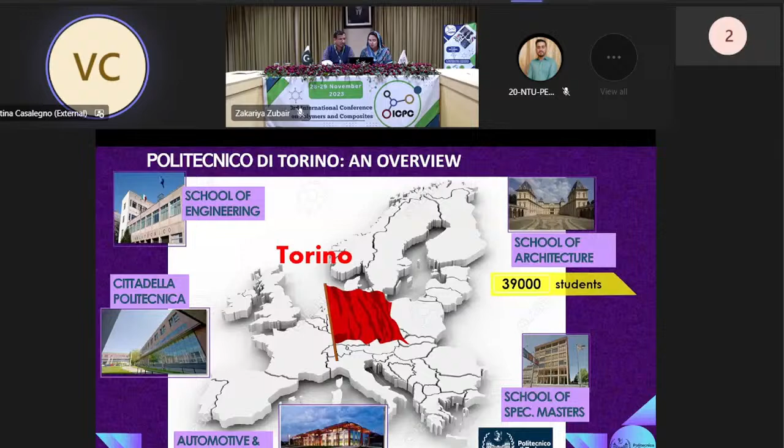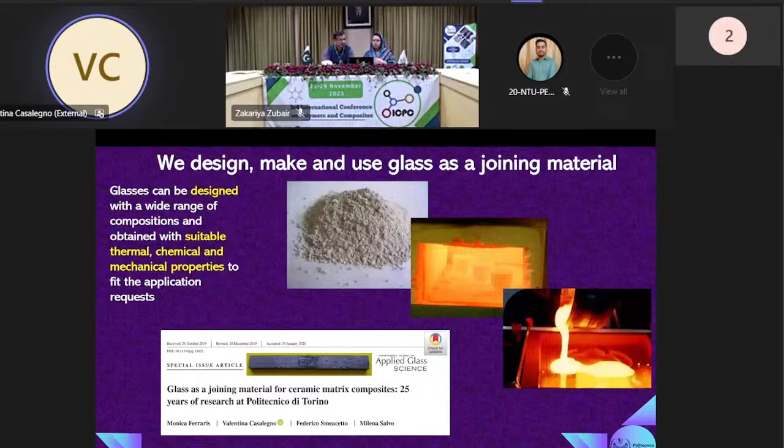We are involved in this kind of research for several years, and we started more or less 20-25 years ago. We developed this kind of joining materials for different applications for ceramics, but also for composites, polymeric-based composites, or CMC composites, or also for dissimilar joints, so CMCs to metals or to other kinds of materials.

Why do we choose glasses and glass ceramics as joining materials? First of all, because they are versatile. We can define their composition, and we can tailor, based on different composition, the coefficient of thermal expansion or the wettability behavior on different substrates. In general, glasses are able to wet ceramics and composites, ceramic-based composites, and then they can be used as joining materials in joining processes without applying any pressure.

This is very important for the technology transfer of these processes to companies. We can transform glasses into glass ceramics using controlled crystallization process, and this is beneficial in order to improve the creep resistance and the thermomechanical behavior of the joint. These joining material glasses can also be self-healing at temperature above the softening point, and of course they are low-cost materials and not affected by oxidation if compared, for instance, to metals or to metallic brazing alloys.

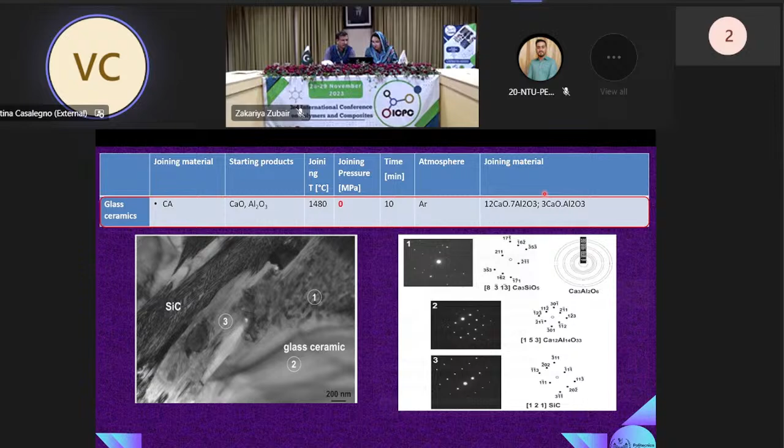This material was studied and designed in particular for nuclear environment. And here you can see some nice pictures of joined silicon carbide based materials.

And we tested also this glass ceramic under specific nuclear irradiation, and this glass ceramic was neutron resistant up to 530 degrees at 20 dPa. That is a sort of threshold for the behavior of materials in nuclear environment.

And the most interesting result was that the thermomechanical properties of this joining material did not change after this test. So after morphological observation and after mechanical test, the structural properties of this glass ceramic material and also of the joined components were not changed.

And we also tested some other composition of glasses and then glass ceramic for joining oxide-oxide composites. Here you have an example of the cross-section of a joined component, and here the base materials to be joined are oxide-oxide CMCs. So they have a matrix of alumina and zirconia, and they are reinforced by alumina fibers.

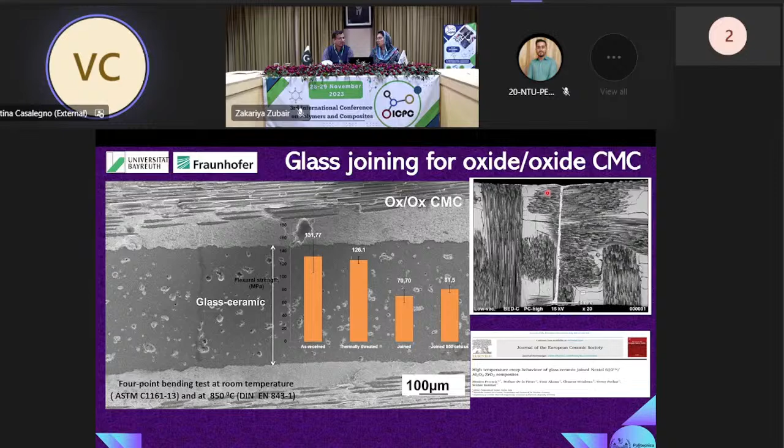joined components. And we performed also other characterization in order to investigate the creep behavior, since the idea is to use these joined materials at high temperature. And here you have the results of some creep test carried out at 1000 degrees for 50 hours at a load of 40 megapascal in bending stress.

And it was demonstrated that these joined components obtained by using this glass ceramic can be stable up to these conditions.

We also studied other systems for joining CMCs, not only to other CMCs, but also to metals. This is an example of the same composites, so a matrix made of alumina and zirconia, and the reinforcement is given by Nextel 610, which are alumina fibers, joined with titanium alloy, titanium 6 aluminum 4 vanadium alloy, and also in this case we used a glass ceramic as a sealant material.

And here you have another activity carried out by Professor Smeacetto and Professor Monica Ferraris, who are involved in research on joining materials here at Politecnico di Torino.

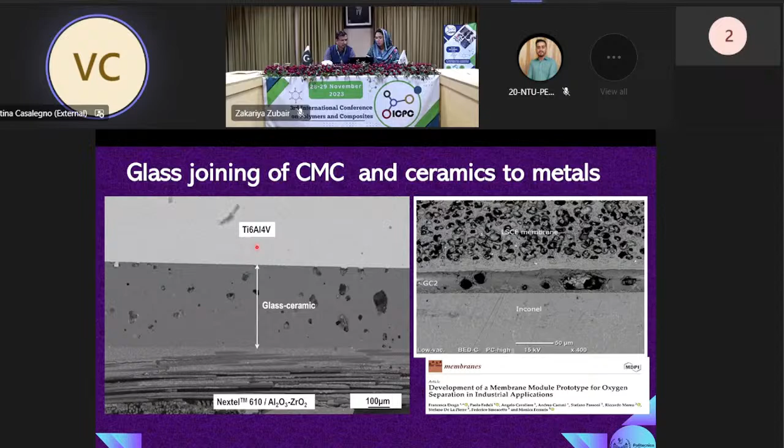And also in this case, we used a different glass ceramic material to join metallic material, Inconel, to ceramic material for different applications. As you can see, there are some porosities in the joining material, but this is common for glasses and glass ceramics, and they are not detrimental for the thermomechanical resistance of the joint.

Other activity regarded the study of a specific joining technique that we call the RM, wrap joining technique. RM stands for refractory metal material. So the idea is to use a sort of wrap of materials made of pure silicon and then a refractory metal - in principle molybdenum, tantalum, zirconium, or niobium - and use this wrap of materials to obtain the joint

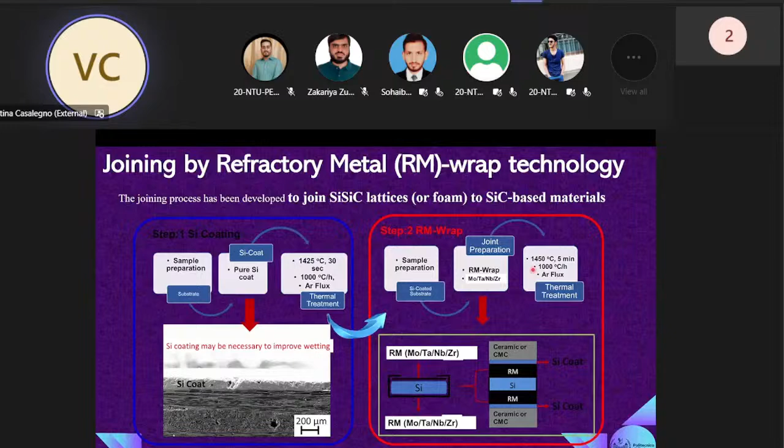between different substrate materials. We tested this specific joining process on bulk ceramic and on different CMCs: silicon carbide matrix reinforced by silicon carbide fibers, or silicon carbide matrix reinforced by carbon fibers. And the joining process was carried out at around 1400 degrees for 5 minutes. So here you have the result of this activity.

We use this joining technique to join different kinds of materials and different shapes of materials. In this case, in picture A, you can see that we used this joining material to join a silicon carbide based foam. And the final structure of the joining material is shown in picture B.

It is in principle an in situ formed composite material where the matrix is made of silicon, and the reinforcement particles of this in situ composite are molybdenum disilicides, or if we use different refractory metals, niobium disilicides or other compounds. In the picture with the yellow frame, you can see the result of an oxidation test on this kind of joint, and we can observe that the microstructure was unchanged after this oxidation test carried out at 1100 degrees for several hours, in air, to check the oxidation behavior of this joining material.

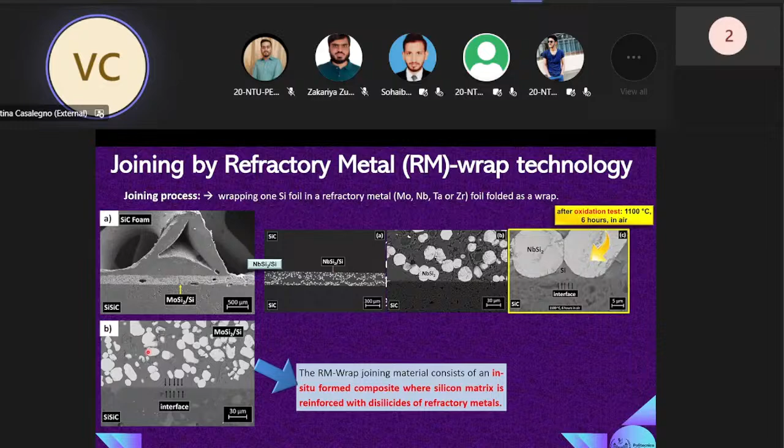Another activity, I'll give you a few details, was carried out for improving the mechanical resistance of the joint. The idea is to do a sort of machining of the surface to improve the strength of the joint and to create interlocked surfaces.

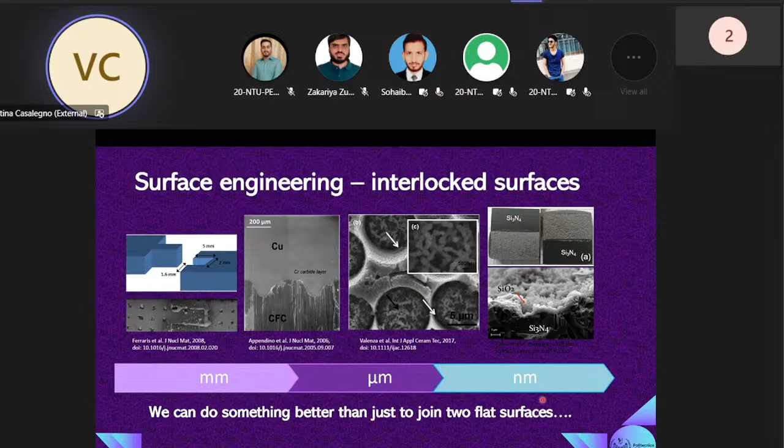So we started from the macro scale, millimeter machining of the surface of the materials to be joined, moving to micro scale and nanometer scale. The idea is to use this modification of the surface in case of non-direct joining, so in case of a joint obtained with some filler, to increase the strength of the joint and the adhesion of the joining material. So we can use the preparation of the surface to remove contaminants, or to obtain a sort of chemical functionalization of the surface.

But our activity focused on texturing, to obtain a sort of increased roughness on the surface. The idea is to promote the interlocking effect by the retention of the joining material in the joining area, and by improving the formation of anchoring points between the joining material and the surface.

This is the idea of this mechanical interlocking, to create brush joints between the two surfaces in order to maximize the interface strength and to create a non-planar interface and non-planar contact area, increasing the mechanical properties of the joint. This is, for instance, one of the activities that we carried out.

As you can see on the right, there is a silicon carbide composite that was surface structured, and in this way we increase the interlocking effect and the penetration of the brazing alloy.

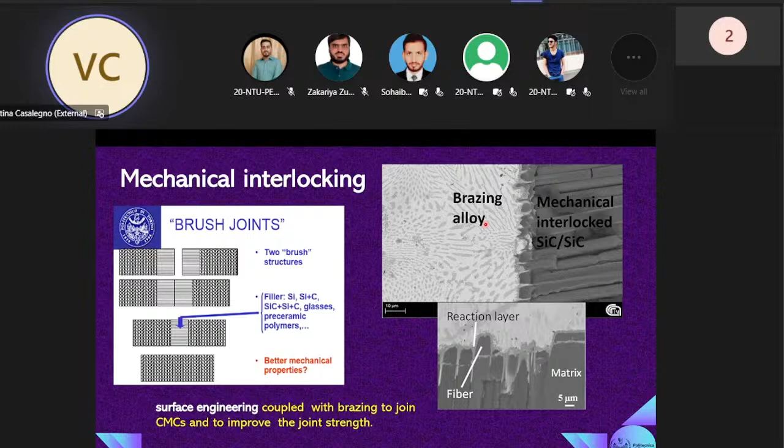I will skip these two slides, sorry, because I just want to show this activity concerning the modification of the surface in case of silicon carbide composite.

The idea is to obtain a selective removal of the fibers using different conditions of plasma etching, based on different gases, different applied power, and different exposure time.

The final effect is visible here on the left. This is the microstructure of untreated silicon carbide composite. And then you can see the results of different etching treatments, where we did a sort of preferential etching of the fibers.

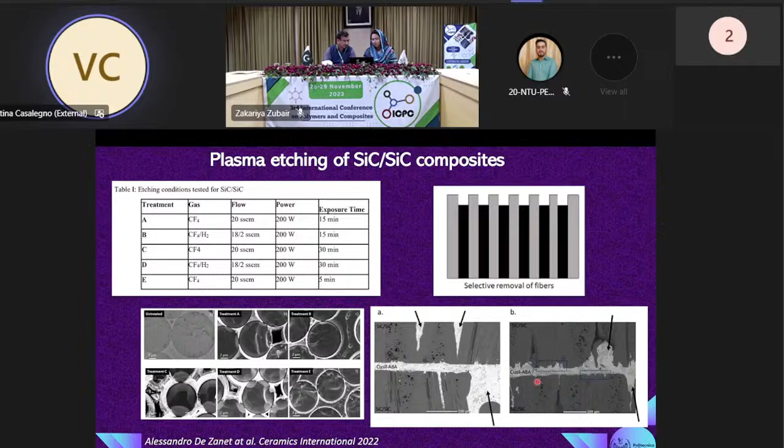And this was beneficial in terms of interpenetration of the brazing material inside this area of the fibers that have been removed by this etching.

We tried to check and assess the real effect of this structuring by using a single lap offset test in compression. Untreated joined CMCs reached a strength of around 76 megapascals, while in case of these brush-like structured samples, the average mechanical strength was around 120 megapascals. So this is a very good result.

We also tried other activities by modifying the surface using a sort of thermal etching of the surface.

This is the result in case of SiC/SiC composites using different treatments at 1450 degrees for 2 hours and for 4 hours in a controlled atmosphere. The best results were obtained with the shorter treatment. It is possible to observe a sort of matching on the surface, which is beneficial for the retention of the joining material and for this interlocking effect. This is the result of these modified surfaces, shown on the bottom part of the slide.

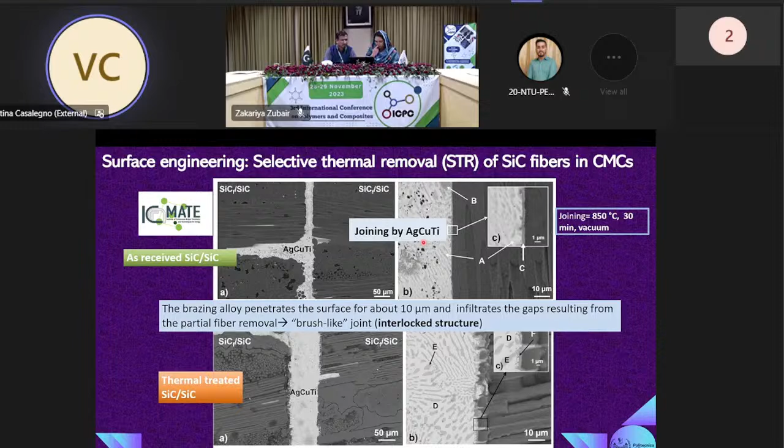Okay, I will finish in 3 minutes, I think. I just want to show you the results of this CEM-WAVE project.

We worked also within this European project for the study of joining for silicon carbide and oxide materials. The idea is to try to replace the metallic tubes commonly used in this part of components used in the steelmaking process and industries, by using CMCs produced with a specific technique: chemical vapor infiltration based on microwave.

We worked on different kinds of joints, butt joint and flat joint, according to the direction of the fibers. And we focused our activity on selection of glass ceramics and brazing alloys for these two kinds of materials: silicon carbide and oxide CMCs.

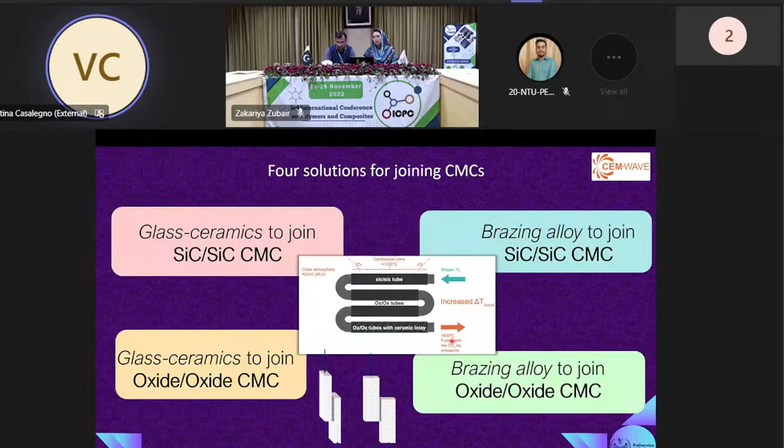Just a few pictures concerning this activity on the use of brazing alloys for silicon carbide. We tested a specific joining material based on nickel, chromium, and iron, and we solved the most important infiltration issue of this brazing alloy within the open porosities of the composites by using modification of the surface, for instance by introducing additional interlayers, in this case a molybdenum interlayer.

The other activity regarded the use of a specific glass ceramic composition to join oxide CMCs. You can find more information concerning this activity in the Journal of the European Ceramic Society.

And in this case, we tested these specific joints in some extreme environments by exposing directly the joining material and the joined components to this flame test, in order to reproduce the steelmaking environment and the final conditions where these components were to be placed.

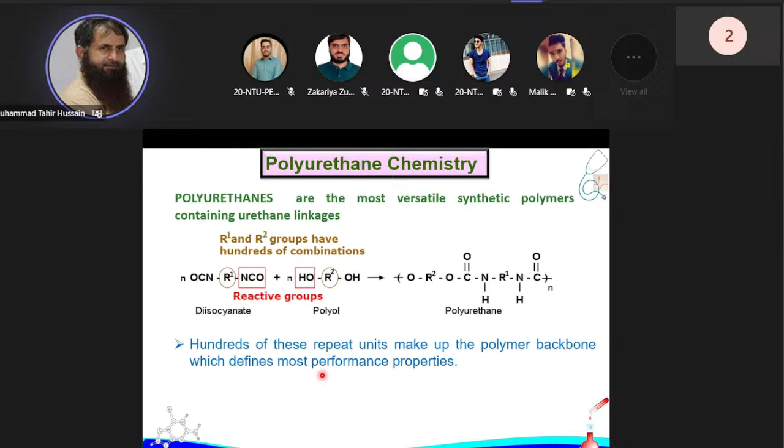If we look at the polyurethane family, polyurethanes comprise flexible polyurethane foams, rigid polyurethane foams, coating adhesives, sealants, and elastomers, thermoplastic polyurethanes, binders, and water dispersible polyurethanes.

So what are water dispersible polyurethanes? These are binary colloidal systems where stabilizing group containing PU particles are dispersed in aqueous medium, in which some ionic groups are present that help disperse the material into water. Here there are some carboxylate groups on the polymer that help disperse that material into the water.

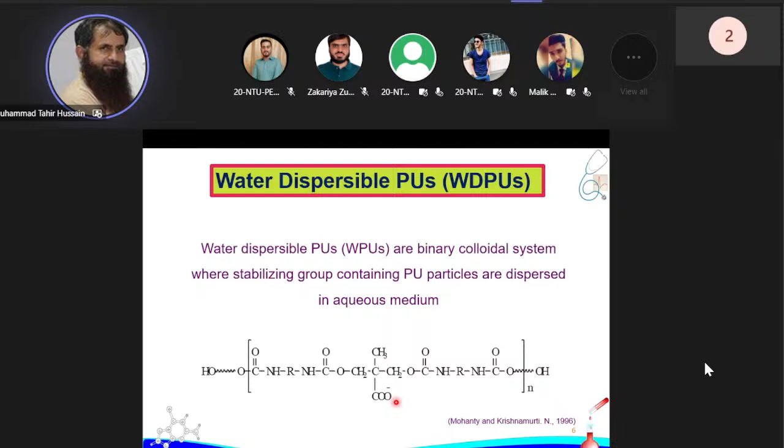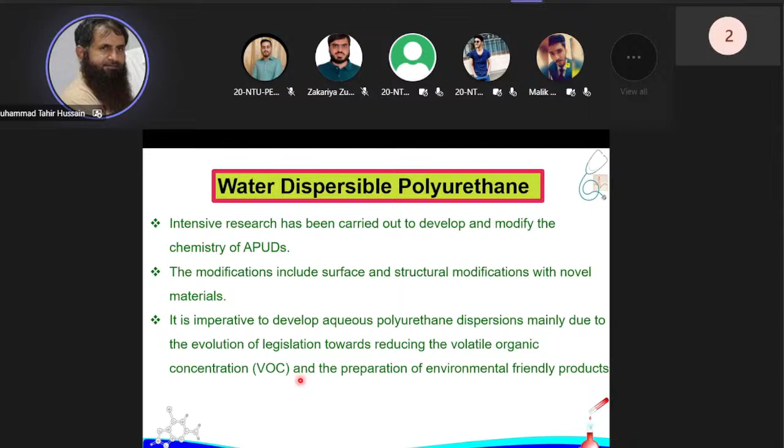Intensive research has been carried out to develop and modify the chemistry of APUDs. The modification includes surface and structural modification with novel materials. It is imperative to develop aqueous polyurethane dispersions mainly due to the evolution of legislation toward reducing volatile organic concentration and the preparation of environmentally friendly products.

Properties of water dispersible polyurethanes: they are easily dispersed in water, contain low volatile organic components, and are non-toxic, odorless, safe to use, and environmentally friendly. They also show high initial bond strength, excellent heat resistance, and non-yellowing exposure to UV light, which is the drawback of conventional textile finishes.

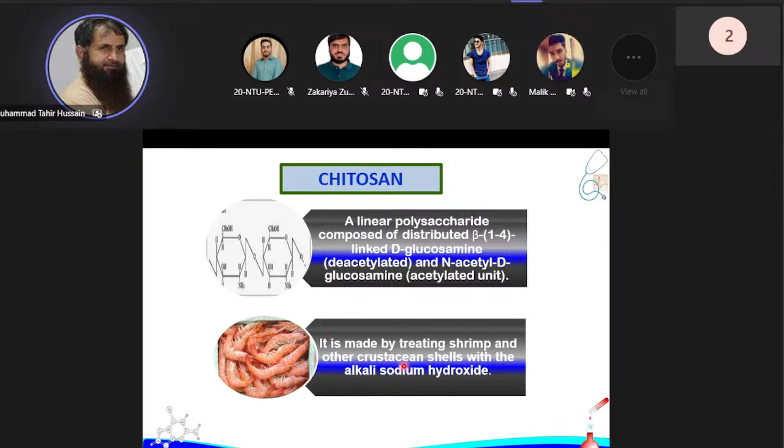In this research, we use chitosan, a biological material that is a linear polysaccharide composed of randomly distributed beta-1,4-linked D-glucosamine deacetylated units and N-acetyl D-glucosamine acetylated units. It is made by treating shrimp and other crustacean shells with alkali sodium hydroxide.

Another material we use is curcumin. Curcumin is 1,7-bis(4-hydroxy-3-methoxyphenyl)-1,6-heptadiene-3,5-dione, the active component present in turmeric. It is extracted from the roots of the Curcuma longa plant, normally known as turmeric.

Owing to its components, curcumin has the ability to impart several pharmacological effects, for example antifungal, antibacterial, anti-inflammatory, antioxidant, anticoagulant, and anti-tumor properties. It is also used as a dyeing agent, and dyed fabrics, for example on silk fabric, showed very good fastness properties.

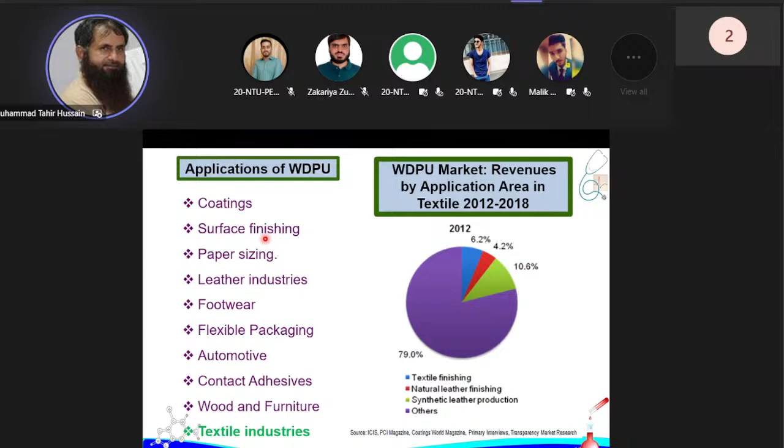Applications of water dispersible polyurethanes include coating, surface finishing, paper sizing, leather industries, footwear, flexible packaging, automotive, contact adhesive, wood and furniture, and textile industries. They are extensively used in textile applications, especially spandex lacquer, textile laminates, breathable membrane clothing, PU coated garments, and buoyancy aids.

So, need of the project. In the textile industry, normally formaldehyde-based finishes and binders are commonly used as coating material to improve fastness properties or as durable press finishes. For example, urea formaldehyde press finishes are used that contain formaldehyde, which is a carcinogenic material, and such finishes cause allergic reactions and skin diseases.

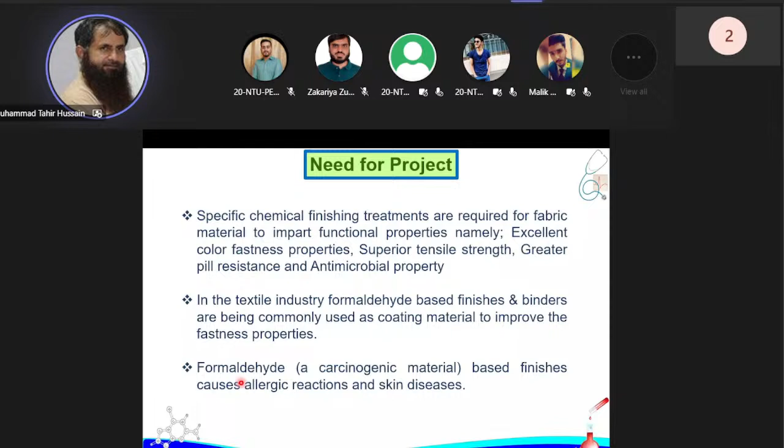So we have a best option to prepare bio-based water dispersible polyurethanes to overcome these problems. Water dispersible polyurethane-based textile finishes are formaldehyde-free finishes, and incorporation of biological molecules, for example chitosan and curcumin, into the backbone of PU has become of interest to many researchers.

In this research, the synthesis and characterization of novel chitosan and curcumin-based polyurethane dispersions has been prepared. These are very safe, formaldehyde-free finishes with pronounced resistance against pathogenic microorganisms that improve the surface properties of fabrics.

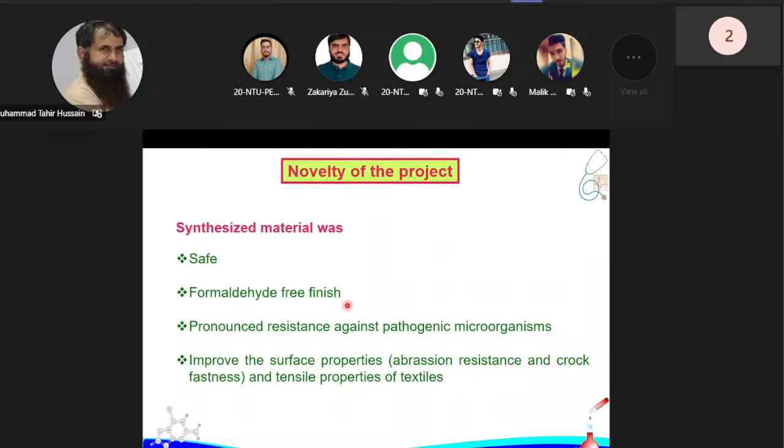In this research work, we used IPDI, polyethylene glycol, dimethylol propionic acid, chitosan, and curcumin. We used blends of chitosan and curcumin, increasing the amount in every incoming sample. First, we prepared the pre-polymer by reacting the isocyanate with the hydroxyl groups.

This pre-polymer is formed by the reaction of NCO and OH groups, which is further reacted with dimethylol propionic acid. We use the hydroxyl groups of these materials to further extend this material, which has already been incorporated into the pre-polymer. In the next step, we neutralize this material with triethylamine.

This triethylamine acts as a base to neutralize the acidic component of the DMPA, and after that we obtain the pre-polymer.

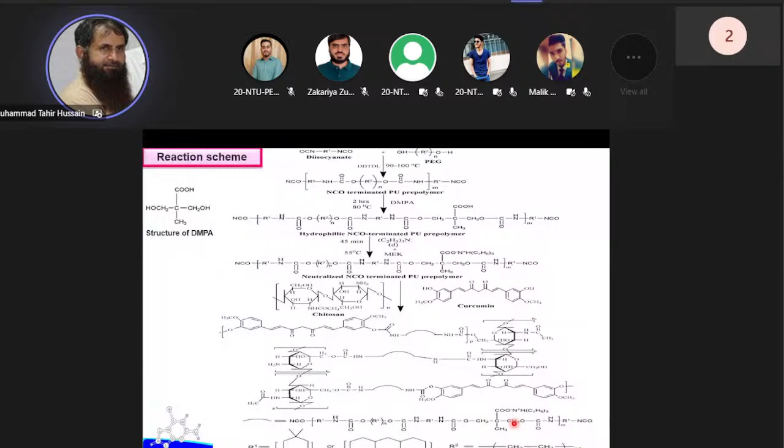What does it mean that the pre-polymer is isocyanate terminated? It contains NCO groups at the end of the chain, which can further react with the hydroxyl groups of chitosan or the hydroxyl groups of curcumin, which is further extended. This bridge represents parts that have been simplified to reduce the structure of our presentation.

We used three kinds of fabric for this study: one dyed with reactive dyes, another printed with pigment dyes, and a third one that is white, having different blend ratios, GSM, PPI, and EPI. PPI means picks per inch, and EPI means ends per inch.

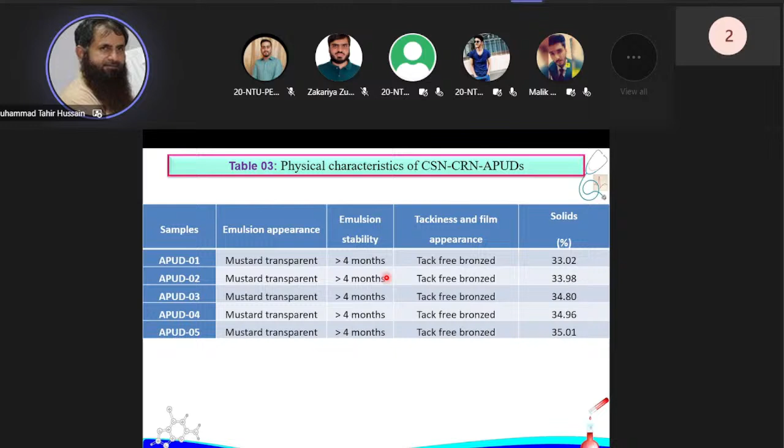We also studied the stability of these materials, which showed stability for more than 4 months. However, the materials with higher chitosan and curcumin content were not very stable, while the lower samples containing a small amount of chitosan and curcumin were more stable compared to materials with more content.

We determined the solid content of the material by weighing the dispersion after drying and the weight of the dispersion before drying, multiplied by 100. These are some of the material properties we assessed during our research.

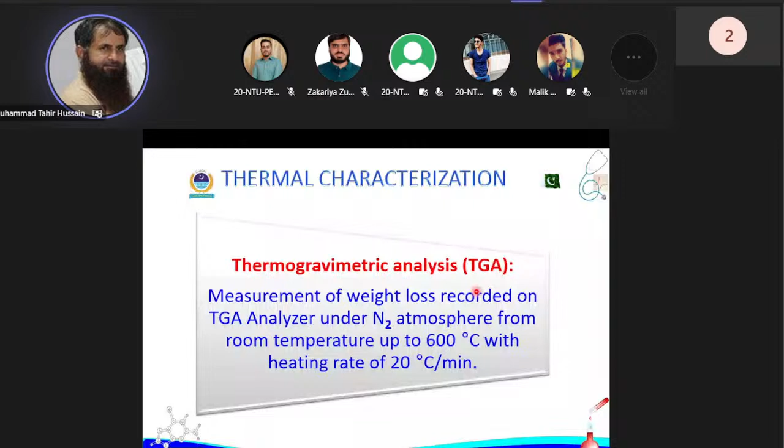We characterized our material using FTIR and electron microscopic analysis, and thermogravimetric analysis to determine the thermal resistance of the material. We determined the molecular weights using gel permeation chromatography. Antimicrobial potential was assessed using the disc diffusion method, and mechanical analysis was determined using tensile stress.

We concluded our research work according to the FTIR analysis. In the first step, we reacted PEG with IPDI, and further reacted this with DMPA.

After that, we studied our material using GPC studies, and determined the number average molecular weight, the weight average molecular weight, and the polydispersity, which is the ratio of Mw and Mn, using the GPC studies.

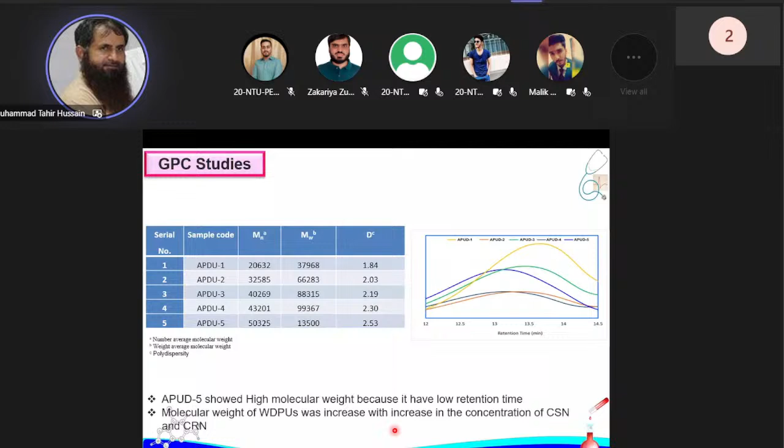We have studied the coating of our finishes using SEM analysis. The untreated fabric shows no concentration of finish. The fabric treated with 2% emulsion finish shows a small amount of finish on the yarns, while the material treated with 4% finish shows the highest concentration of APUDs over the fabric. We also studied the biocompatibility of polyurethanes.

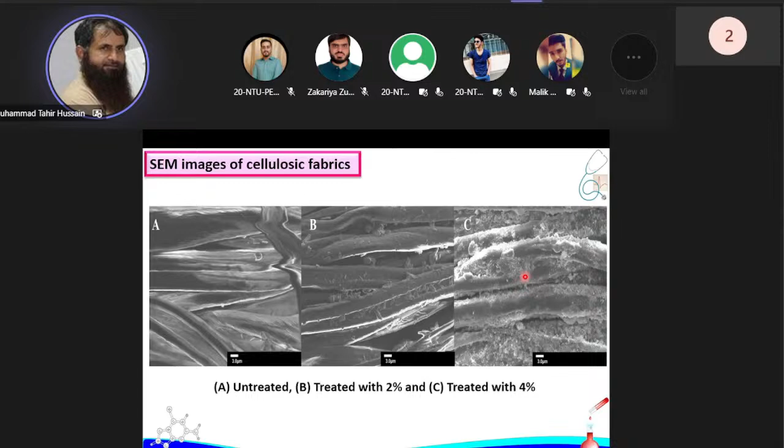We added these dispersions along with human blood, and found that they are biocompatible. The material containing a small amount of chitosan and curcumin showed less biocompatibility, but with increasing concentration of chitosan and curcumin, the biocompatibility of the material increased.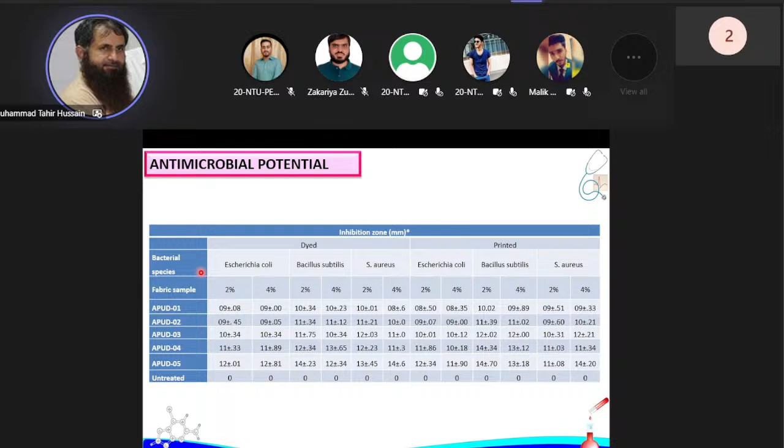We also determined the antimicrobial potential of the material, and all materials showed antimicrobial potential against positive and negative bacteria. We used E. coli, B. subtilis, and S. aureus for these studies.

We also studied the washing fastness of the dyed and printed fabric, and observed that less staining appeared on the multi-fibre fabric using a small concentration. With increasing concentration of the finish, the washing fastness decreased.

We also determined the dye color fastness to rubbing using dyed and printed fabric, and found a similar observation: smaller concentrations of material showed better fastness properties compared to material containing the highest concentration of curcumin and chitosan.

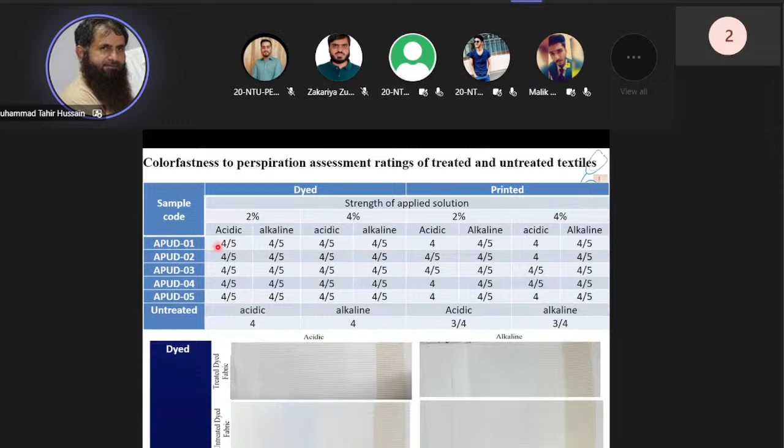Similarly, color fastness to perspiration was observed, showing a similar result. But we found there was not much difference between the lower concentration and the higher concentration of materials.

The aqueous polyurethane finish increased the tensile behavior of our materials. Similarly, with the 4% finish, the same effect was observed, as the tensile strength of our material increased along both the warp and weft sides.

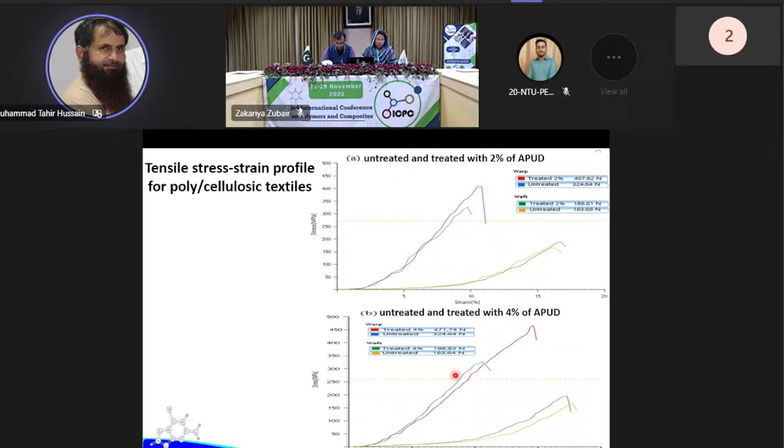Conclusions: In this research work, novel aqueous polyurethane dispersion-based antimicrobial textile finishes were synthesized by varying the molar quantities of chitosan and curcumin in the PU backbone. FTIR confirmed the structure of our material, and it was observed that lesser amounts of chitosan and curcumin showed excellent miscibility with the PU, leading to improved stability of the dispersion. SEM images revealed that the untreated textile surface has no dispersion on the surface sample.

The sample treated with 4% dispersion showed more concentration of PU on the surface of the fabric compared to the 2% finish. All the chitosan and curcumin-based water dispersible polyurethane emulsions revealed almost comparable antibacterial performance against the tested bacterial strains.

The effect of the APUD coatings on color fastness properties such as perspiration, alkaline and acidic, rubbing, and washing of the coated, dyed, and printed polycellulosic textile revealed that all fastness properties were significantly improved after using the APUD. Thank you very much

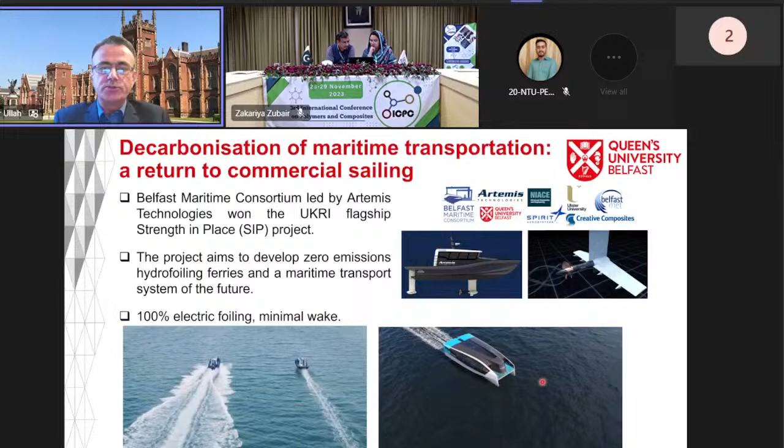At Queen's University, we were mainly working on three projects. One was on impact modeling and experimental validation, where Dr. Scott Millen was a postdoc. Another project we worked on was about hybrid metallic composite laminates for bolted joints, where Dr. Tommaso and Burhan were the researchers.

And then we also work on the application of AI in the failure prediction of composite materials. Dr. Lei Wan was the postdoc on this project.

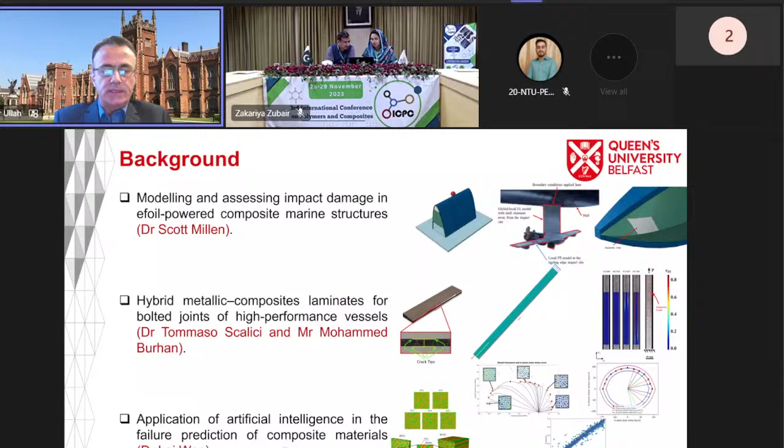Due to limited time, I will just give you an overview of the first two projects. The first one is about impact modeling. As we can imagine, these boats can have two types of impact.

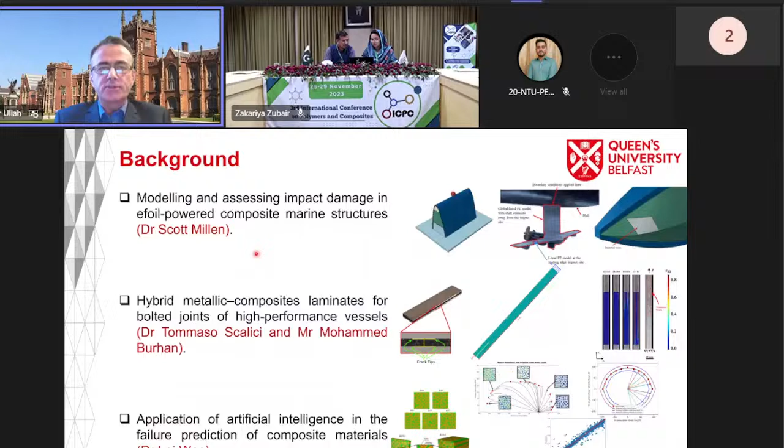One is under the water, mainly the hydrofoil, which is this wing-like structure under the water. It can either impact with some debris or strike a large marine life.

In this case, we do two types of models. One is the mesoscale model of the leading edge, which is the leading edge of the wing. Here we model this small section of the leading edge.

And in another one, which is what we call the global local model of the entire foil, shown here. I will explain this in a minute.

Another thing is that the boat can have impact above the water. In this case, the hull of the boat can impact with other vessels or maybe collide during docking. Again, we do two types of models.

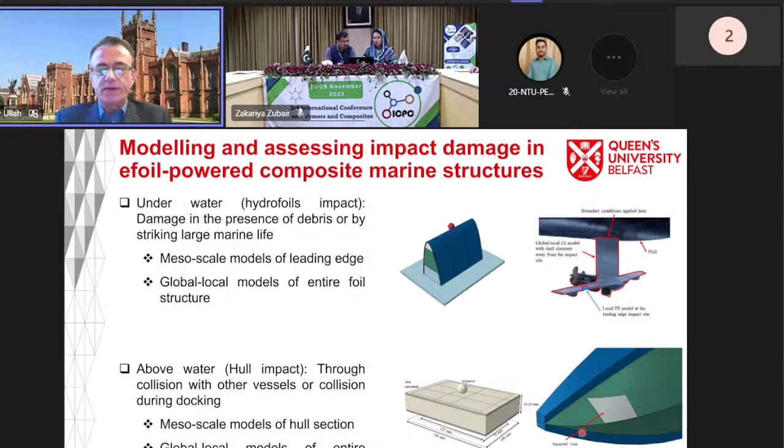One is a mesoscale model, which is a small section, 100 by 150, and one is the global local model, shown here, of the whole boat.

In the first model, this mesoscale model, this is a composite structure basically, and we have this carbon protection here, then a foam core, and then this is the rigid support behind it. We are using a rigid impactor of 2 kilograms, and the velocity is 5 meters per second, so the impact energy here is 25 joules.

Here we are using FEA modeling with about 68,000 elements. In addition, we have also considered ice impact, which can happen in this particular case - a small block of ice of mass 0.05 kilogram.

In case of this ice, we are using SPH to model it. In this global local model, we then model a very small section with full detail, but model the remaining part as shell elements, which is computationally very efficient. We're using about 106,000 elements, and out of this, 38,000 are shell elements.

In case of the hull, we again use the mesoscale model, as you can see here. Again, we are using a 2 kilogram rigid impactor, 5 meter per second velocity, and we are using 10 elements through the thickness of the core.

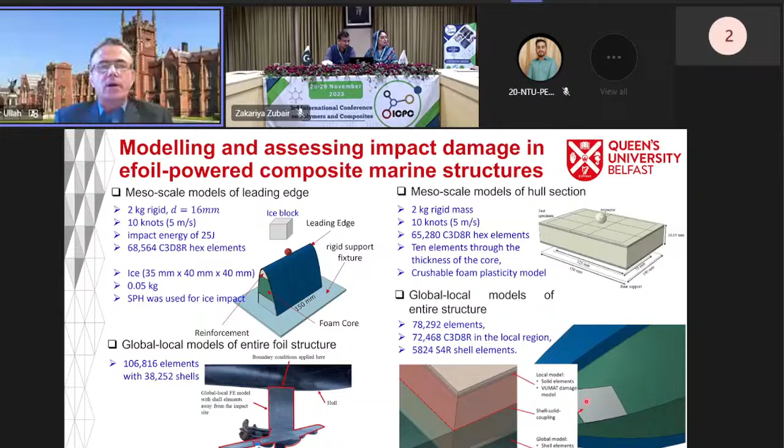These are our damage models that we are using. We are using the interlaminar damage model, where we use cohesive contacts.

And then we are also using the intralaminar damage model, so we include both fiber-dominated damage and matrix-dominated damage, and we also include some nonlinear shear response of the matrix.

So these are some results of the leading edge foil. This is a comparison of the mesoscale model and also the global local model, mainly for the delaminations, which are mostly the same. Similarly, this is the result for the global local model.

In this case, this is the matrix damage prediction from the mesoscale model, and this is for the global local model.

Again, this is a comparison of the force versus time response when we do the impact with the rigid impactor, and this is for the ice impactor. This shows the kinetic energy and how it dissipates after impact.

Here you can see that this was initially 25 joules, and then after rebound, this is what energy is left, and the remaining energy was dissipated in creating these damages. This is for the ice block.

This is the result for the hull impact. Again, we can see the delamination, the matrix damage, and we can also see some permanent indentation. This is the force time response of this impact.

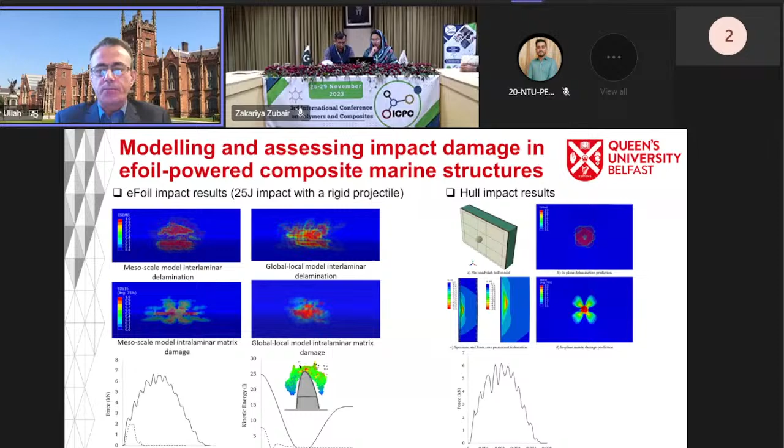Here we also perform some tests both on the flat panels and on this leading edge specimens. These are the different samples. We are using about 6 samples for the flat panels, and 5 for the leading edge. These are the different energies we are getting here. And we are using both hemispherical tups and flat tups here.

This is just to compare the response of the experimental and simulation for the flat panels, at 22.5 joule energy. And this is for the leading edge specimen using this hemispherical tup, and then this is the leading edge with the flat tup. The red one again is the simulation, and the black one is the experiment.

The second project that I would like to briefly describe is about this hybrid metallic composite laminates for bolted joints. As we know, mechanical joints have a lot of positive points because these are reversible - we can do easy inspection and maintenance. But the problem is that we can have this stress concentration. So in our case, we are using this idea of local hybridization within the bolted joint region, as you can see in this figure, to increase the bearing and shearing capabilities of these joints.

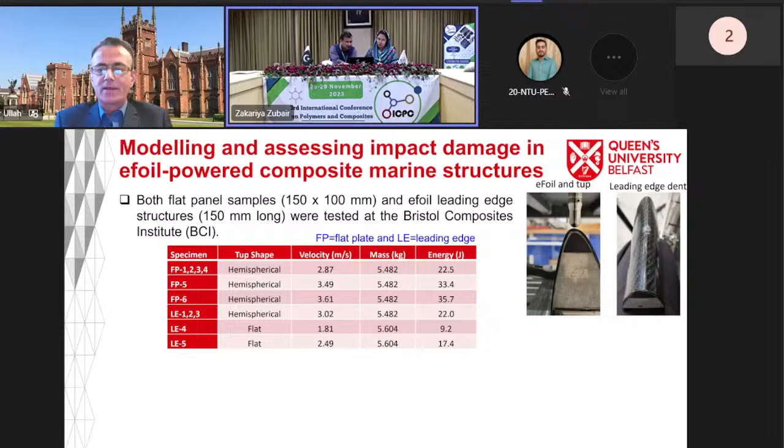Your slide is not moving anymore. It is on the 8th, it's the 8th slide, could you? Okay, just a minute. Thank you, can you see it okay now? Can you see slide 9? Not yet. Could you tell me the slide number in which you are talking? It's slide 9. No, but still - now yes, it's moved to 9.

Okay, sorry about it. Yeah, so as you can see here we have these 3 regions. One is the FRP, then this is the transition region, and then we have the hybrid region here in these hybrid metallic composite laminates.

So our main idea of this project was to find out the interface fracture toughness between the metal and the composite. In this case, we are using this modified transverse crack tension experiment to measure the mode 2 fracture toughness. This is the equation for the mode 2 energy release rate.

Mode 2 means these are the different modes of crack propagation. We have mode 1, mode 2, and mode 3. Mode 1 is the opening mode, mode 2 is the shear mode, and mode 3 is the tearing one. Here we are interested mainly in mode 2.

So you can see that this is how the specimen looks like. In this case, we have one crack here in the composite, and we have this metal here and metal here. And then there are 2 cracks at the interface between the metal and composites.

In our case, as you can see, this is the equation for G2. And in this equation, we have this X, which is what we call the correction factor for geometry and material elasticity. This X is again a function of all these different parameters. So in these 2 equations, we have some material parameters which depend on the elastic constants, and then we have some geometry parameters of this specimen.

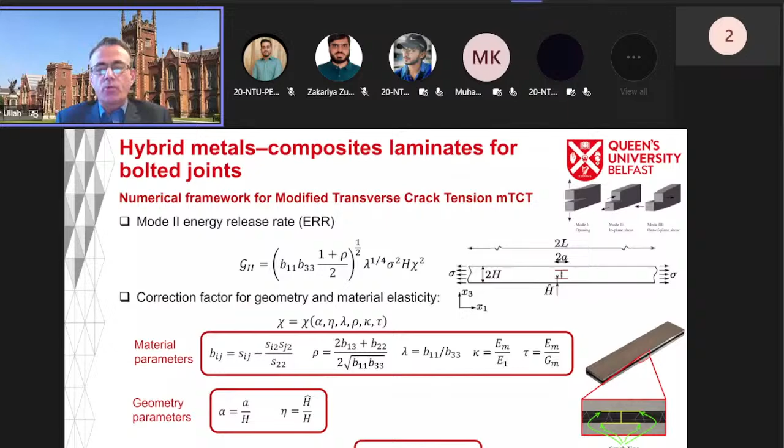In this particular case, we perform some parametric analysis to make sure what should be the dimensions of these cracks in our sample. So for this case, we are doing a lot of simulations here.

So we run about 20,000 simulations with all these input parameters, doing a parametric study. And then we create this type of FEA model.

As you can see, this is just a quarter of the sample, which we can generate because of the symmetry. Here we are using the virtual crack closure technique, which is VCCT. And then the end result will be this X here, which is the correction factor, and this phi, which is what we call the mode mixity.

So the results, as you can see here, for different material parameters. And here we are plotting this mode mixity with alpha. So alpha is the length of this crack here, as you can see in this figure.

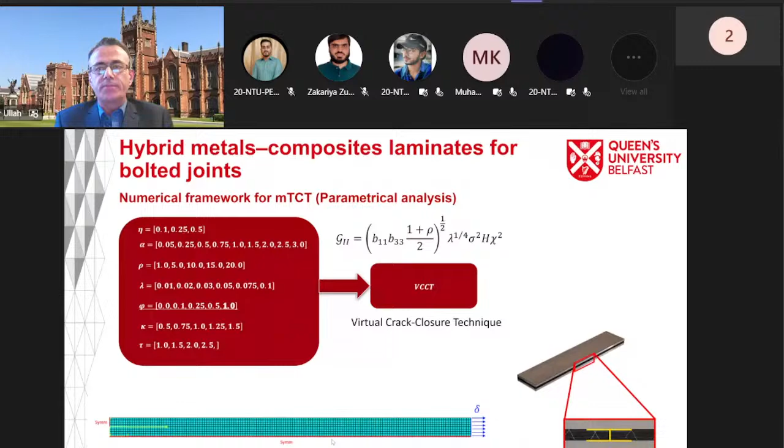As you can see, for different material, if alpha is very, very small, this means that the crack length, this longitudinal crack length, is very small. So this means that this parameter is less than 1, meaning we cannot neglect the contribution of mode 1.

Our main aim is to have a crack only in mode 2. So this means that if we keep this alpha greater than 0.5, as you can see in this case, then this mode mixity is 1, which is what we want in our case.

In addition to this, we can also calculate this X here. So X is, as you can see, if you plot for different materials, this X versus alpha, you can clearly see that X is non-linearly dependent on alpha up to a value of almost 3. And then if alpha is greater than or equal to 3, the value of X stabilizes, leading to independence of alpha.

Now, obviously, we want to satisfy both conditions: mode mixity and this X. So therefore we are choosing a value of alpha, which is 3 in this case.

And based on this, then we can also find out how we will calculate this X. So in this case, for example, we can run different simulations for different values of lambda and rho, which are material parameters.

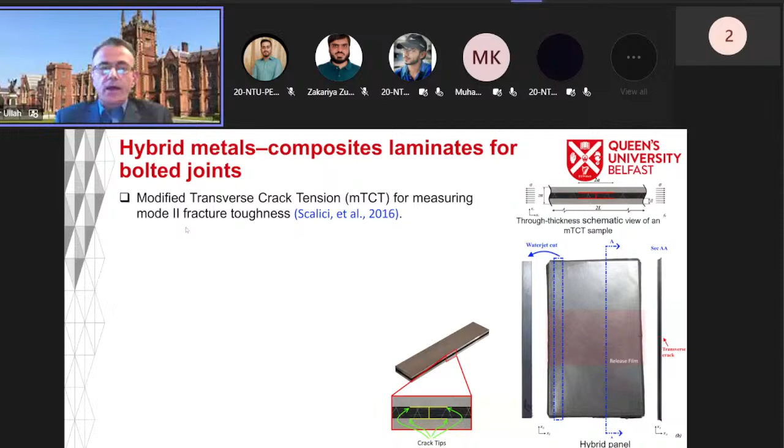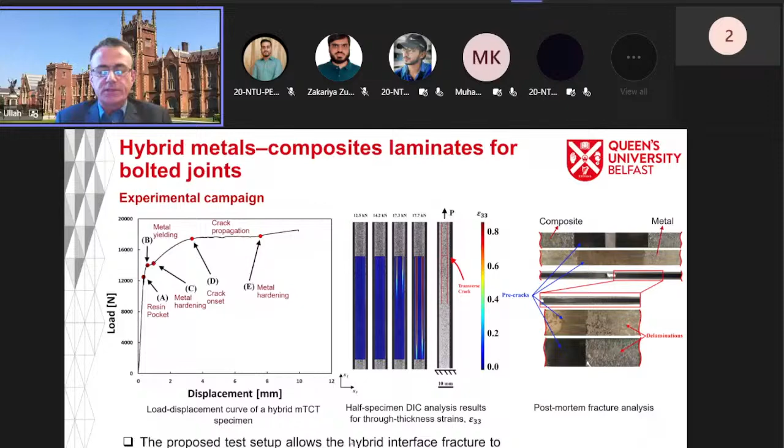Thank you so much, Professor. Your presentation was very good and very elaborative. We have no questions. Thank you so much. Yeah, thank you.

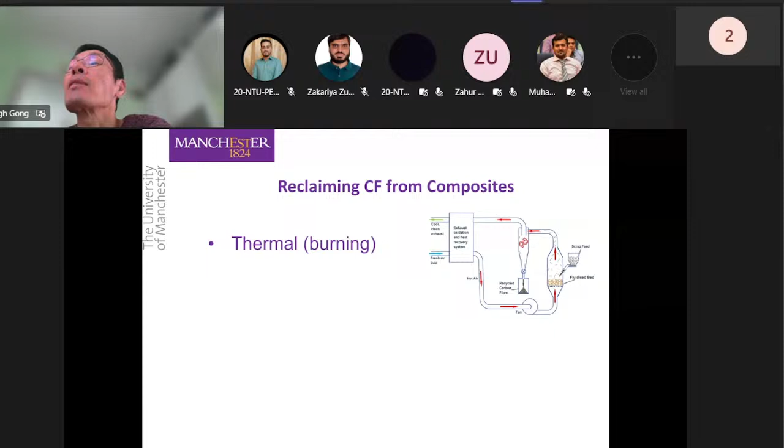The details I'm sure you can find in the literature — there are different ways of doing this, and I think the fluid bed process is probably the most common. Then there's mechanical processing, essentially just crushing the waste material. Obviously the quality of the fibers from this tends to be very poor, but it's very economical and easier to implement in the actual recycling process.

A third method is the chemical process, essentially dissolving the resin and leaving the fibers behind. But you have to be very careful about chemical contaminants in the end — what you do after dissolving, the chemicals used, and the resin. So there are, again, a lot of subtle differences between the different methods people are developing and using.

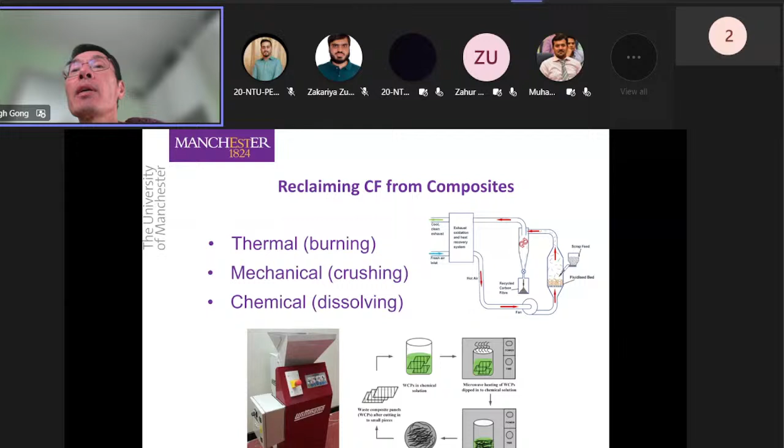Now, the main issue with recycled carbon fibers is that they tend to come in very short lengths, a bit like staple fiber production. The length also tends to vary dramatically, some very long, some very short. Because of the way the fibers are reclaimed, they tend to be very randomly oriented, and that causes problems in application, especially if you want to make unidirectional composites or fabrics where you can control fiber alignment, which is one of the most important aspects of what we've been trying to do.

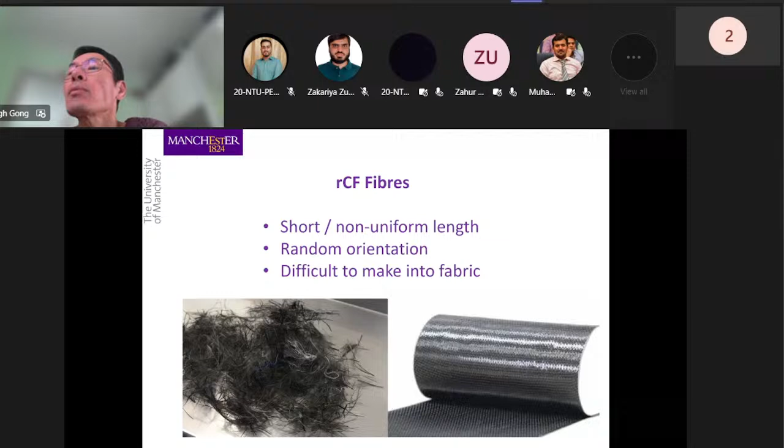We had a large project in collaboration with several European partners and also Airbus, and also with several Chinese research organizations, and the manufacturer of, I think, the latest commercial passenger aircraft in China. The idea was to see if we can use recycled carbon fibers in aircraft and other transport vehicles.

As I mentioned before, the problem with recycled carbon fibers is that they tend to be short and random, which means their mechanical performance in the eventual composite tends to be a bit of a problem. So we were trying to develop composites for secondary components in the aircraft, things like seats, for example, and door panels.

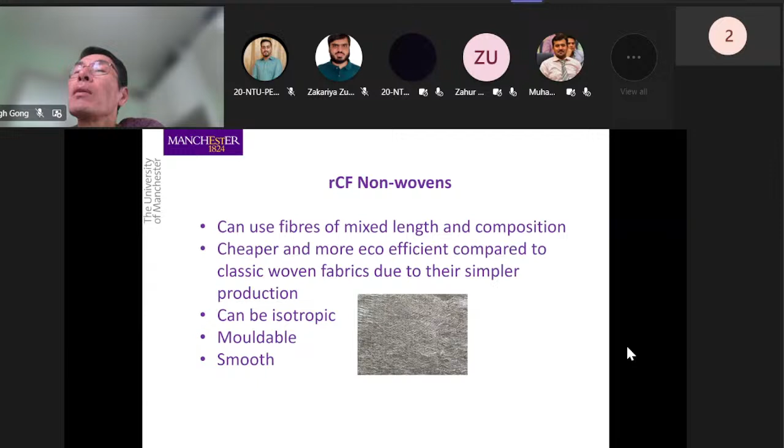More seriously, it can generate a lot of dust material, and carbon dust is harmful to both machines, because it's conductive and can cause circuit shorts and lots of problems. Obviously, it's also harmful to human health. This is something we've been struggling with, and I'll probably mention it again later. So the process needs to be fairly carefully controlled, and a lot of the machines need to be optimized in order to process carbon fibers successfully.

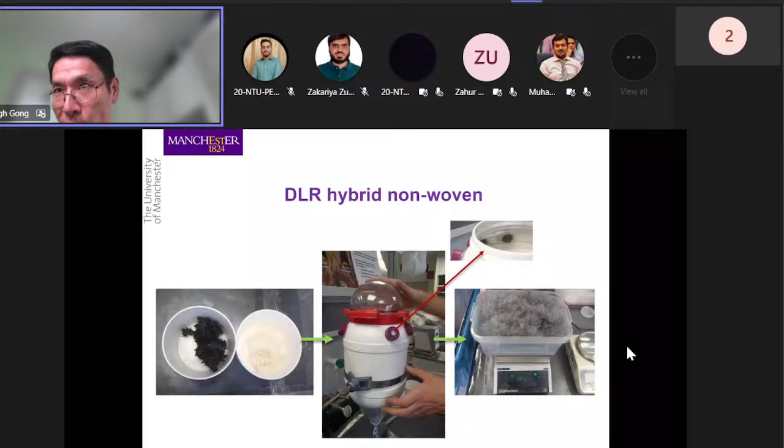Now, as I said, carbon fibers are difficult to open mechanically because the fibers are brittle, they are easily damaged, and generate lots of dust. So as you can see here, they were trying to mix it in a closed chamber manually. But obviously, we are doing research, so this is just doing trials, essentially, using a small non-woven rig, as shown here, which is really very, very tiny.

And then you are successful in making sort of graded non-wovens, graded in the sense that the mixing of the flax fiber and the carbon fiber can be different in the thickness direction of the non-woven. In other words, you can have a fully carbon fiber side, and then the other side is fully flax fiber. So this allows you to tailor the performance of the eventual composite depending on the application requirement.

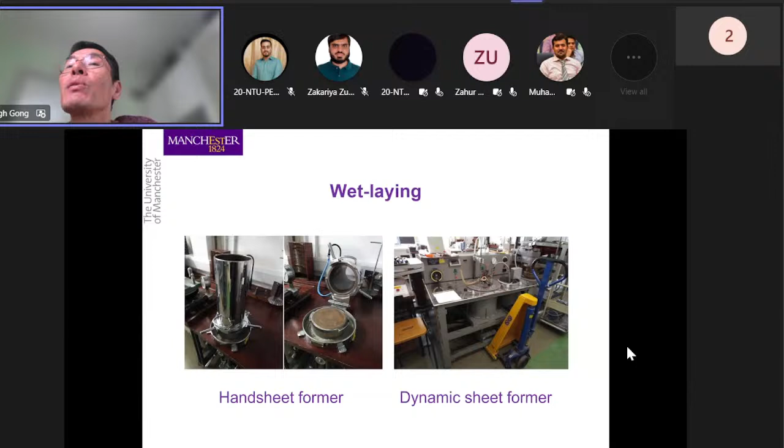But obviously, this is done manually, so we needed something more mechanical. In our university, we try to use wet processing, wet non-wovens, essentially wet laying, which is a very common non-woven making process. For example, we use that to make wet wipes. A lot of these baby diapers are made using the wet process as well, filter materials. Essentially, it's based on the paper making facility.

We had two different types of machines. One is the hand sheet former, essentially a hand machine, by mixing the carbon fiber in fluid and then drawing it onto a filter to form the hand sheet. The other one uses a mechanical device. I say mechanical, it's just basically electrical driven, so it's not a hand held machine, but the basic principle is the same. So you mix the fiber, you drain the water, and you form a non-woven. That's all. It's a bit like paper making anyway.

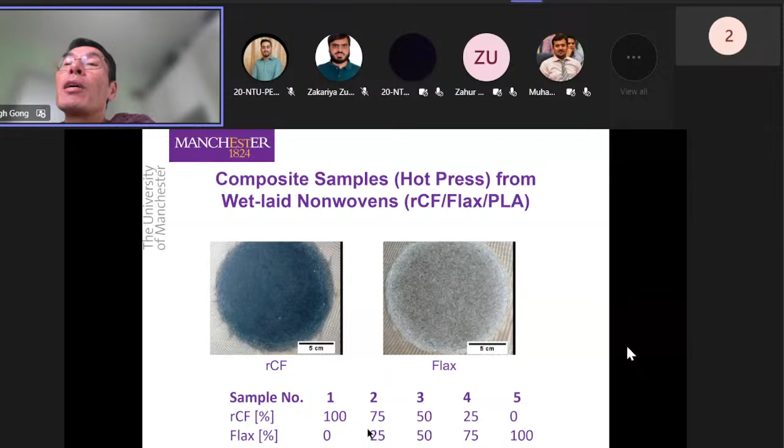And then you look at the composites made out of that, and you find, if I just go back to remind you what number 2 is, because that seemed to be the best performing, with 25% of flax fiber, we can get actually better performance compared with 100% carbon fiber. It's just because of the way the fibers disperse in the composite.

Now, if it's 100% flax, obviously flax fiber is not as good as carbon fibers. And you can see also there seems to be a lot of void within the composite itself, which obviously for composite materials is particularly negative for the performance.

While the right-hand side is a 25% mixing, 25% flax, 75% carbon fibers, you can see the void content is much reduced. There are not really any visible voids. But as the carbon fiber content increases, the problem of fiber entanglement and clustering becomes more serious, and that's when the composite material performance starts to decrease.

Anyway, the details of this work are published, in the Journal of Aerospace. And again, we have a DOI link, and you can find the details in there.

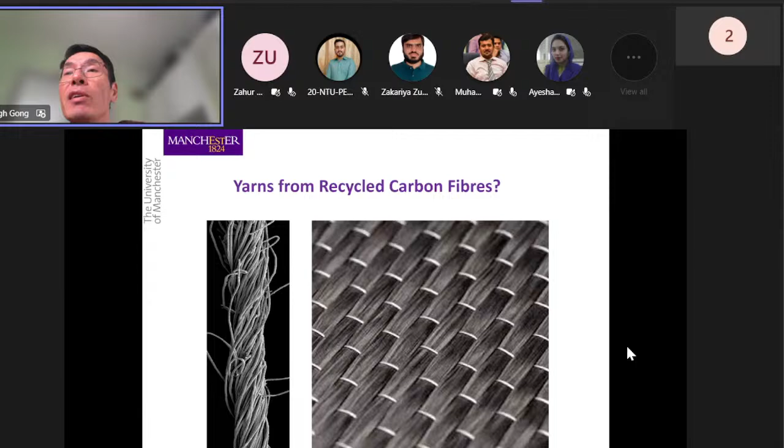Costas Soutis has just retired, actually, but he was one of the leading investigators of this project, although I took over once he retired. Anyway, this is also in collaboration with some organizations in China, including Shenzhen University.

Now, the reason for that... Dr. Hu, please turn on your mic. Your mic is off. Yeah, this mic, I don't understand it. Why it keeps turning off for no reason.

Don't understand it. Anyway, so as I said, because we had a collaboration with Shenzhen University, they developed a new process of recycling carbon composites. One of our staff members was part of that project. It's essentially a chemical process, but assisted by electrical current.

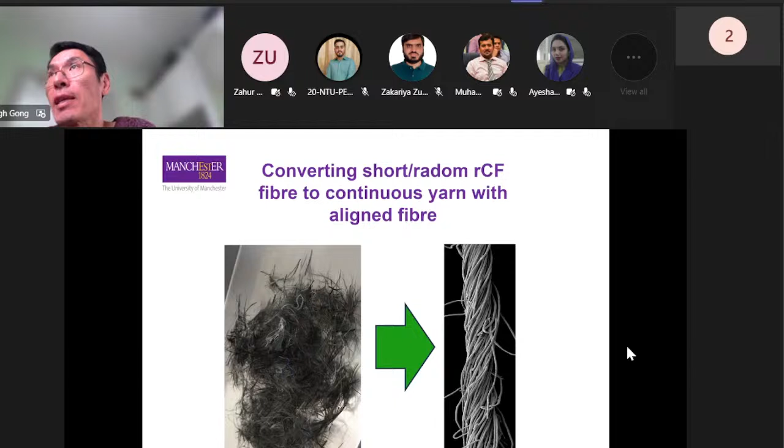So there's a lot of mechanical process going on. As I already mentioned, these mechanical processes cause fiber problems and process problems, because these carbon fibers generate dust material. And the opening devices tend to be very vigorous, and they will damage the fiber and generate lots of this dust material, which needs to be strictly controlled.

I guess this is dependent on where you operate. In this country, we certainly have a lot of difficulty, and we tried to build a lab to do this, and it became almost impossible in the end. So we have to take an alternative approach, as I will describe in a minute.

The other problem is during drafting, the fibers are too stiff and of varying length. So they are not really moving very well, because drafting requires us to control the fibers so they move as they're supposed to, so we can deliver a strand with even distribution of fibers. In the end, you will find that drafting carbon fibers becomes very hard.

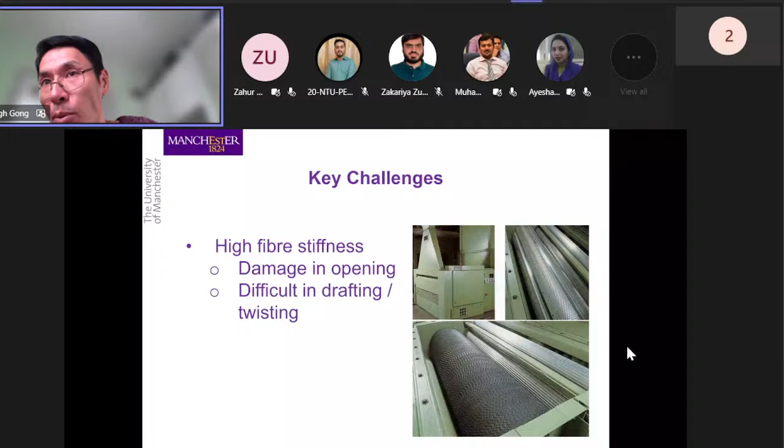Dust material, I already mentioned, so I don't want to repeat. With the contamination of machines, quite often you'll find that if we need to process carbon fibers, the whole machine and the process need to be completely enclosed within a chamber.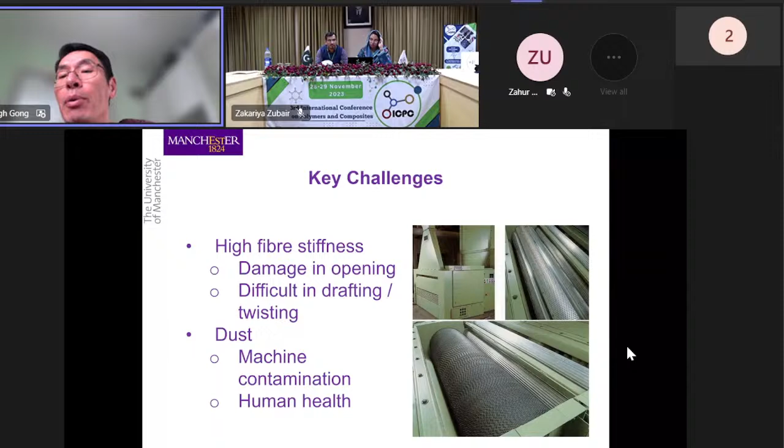Even in our lab, when we had a weaving of carbon fiber yarns, we had to build a separate sort of almost like a separate shed within the lab itself to prevent dust material spreading in other parts.

In terms of the spinning techniques, I review these very briefly because it's relevant. So in the end, you have to turn the fibers into a yarn, suppose you manage to get all the fibers open up and draft it into the required thickness.

Currently you can have ring spinning, which is very difficult to implement. Then rotor, of course, is not very good dealing with dusty fibers. As I said, carbon fibers can generate lots of dust, which can cause problems. Obviously, air jet spinning is not going to work because of the way the fiber needs to wrap around the other fibers, and with stiffer carbon fibers, that can cause problems.

So in the end, we realized friction spinning is probably the best in this case. There are other people trying other methods, but for what we have evaluated, we decided that friction spinning is more suitable because the idea of friction spinning is very straightforward.

So you have two suction rollers, essentially, and they provide friction to the yarn surface. You just need to spread the open fibers into this twisting zone, and then the fibers will be gathered up into a yarn. You withdraw the yarn, in this case, perpendicular to the screen, drawing it out parallel to the rollers, and that's all. In terms of principle, as you can see, it's very straightforward.

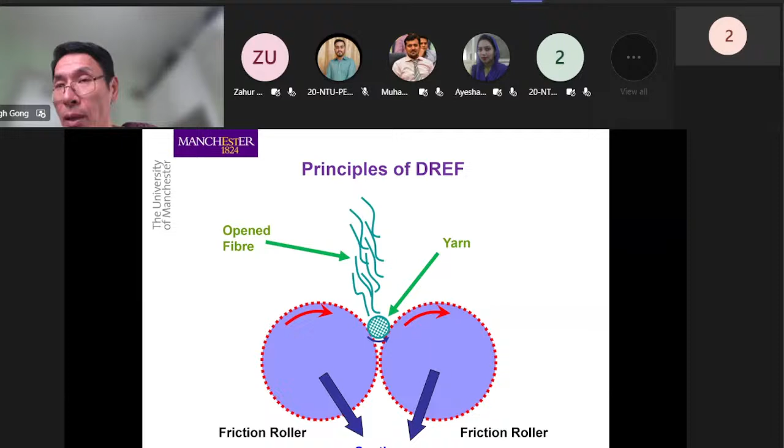But again, trying to implement that becomes hard. And this is the commercial machine. You can see this is the DREF 3, or sometimes called 3000 as well.

Essentially, you have the fibers open up, and then you've got the two friction drums, and you can also feed another drafted strand, which is important because there are people who do that with drafted strand, or you can also feed an additional core filament or core strand through. So you can have one continuous strand core, one drafted core, and you have the sheath. You can have compound sort of structures very easily using this machine.

And this is somebody else's work, by Hassan I think, published in 2018. You can see here they are using a DREF machine, but again, they are using a mixing of staple fiber, carbon fibers, and also nylon. As I said earlier, drafting of pure carbon fibers is difficult to control, so they use the nylon to assist that. Then they use another nylon staple fiber coming from the top, and they also fed another nylon filament through the center. So you can see a lot of nylon fibers involved in actually making the eventual yarn, just because pure carbon fibers are hard to handle.

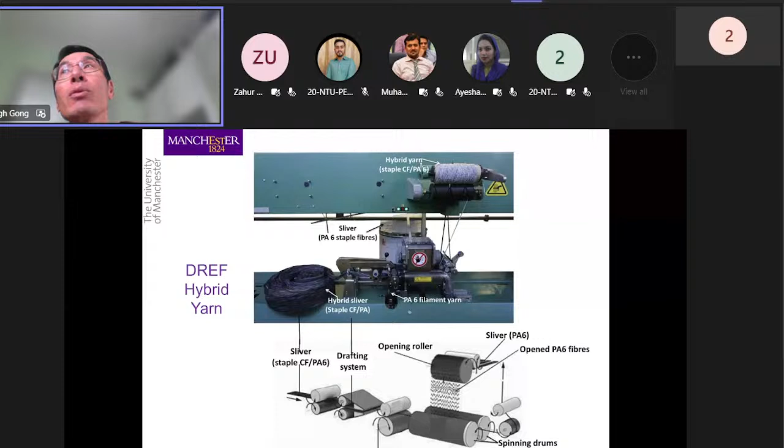Now, of course, this does not resolve the problem of dust generation. You can get away with it in some parts of the world, depending on regulations, but you still have to be very careful. In certain parts of the world, like here, the health and safety control is extremely tight. So we tried to do something similar, but eventually we got blocked, and we had to try something else.

In the end, we decided to use a wet process. Earlier I talked about wet laying in nonwovens, so we tried to combine wet laying with friction spinning, by dispersing the carbon fibers in a liquid. Then we transfer the liquid—instead of using air, we use liquid—to the friction drums. This way, we can contain the carbon dust, so there won't be any dust generation throughout the whole process.

And that's the video showing what we built, just to show you the machine we have built for this.

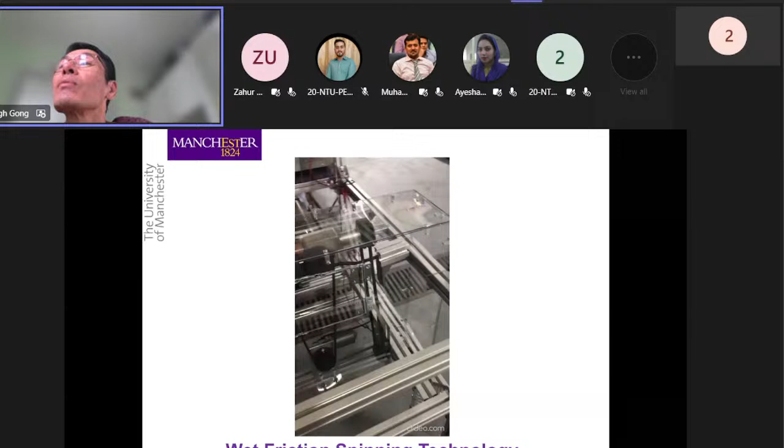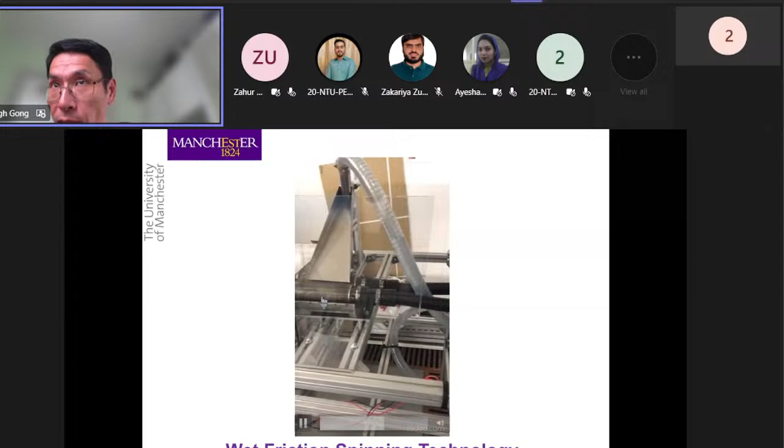So that's the friction drums there, and you can see a lot of duct material for transferring the fibers in solution, and then you of course have a winder to take up the yarn. That's the essence. This is the spinning zone where the carbon fibers will be wrapped around a core. Again, we had to use a core fiber in order to get the yarn out, so it's not a purely recycled carbon fiber yarn. It's a sort of composite with a core fiber, then we have the carbon fibers spun around that.

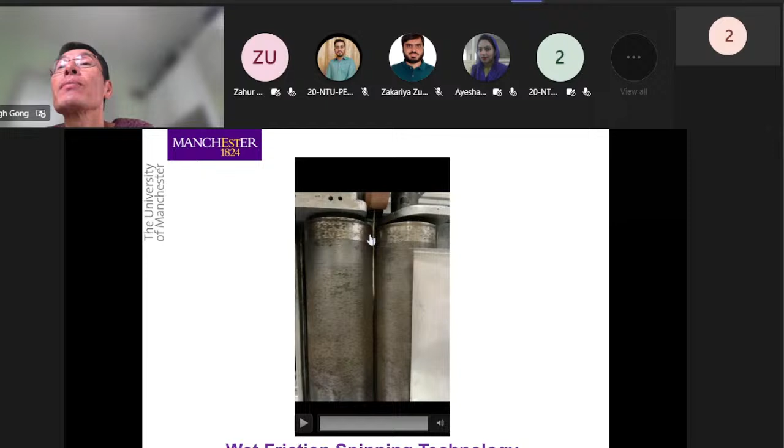And these are sort of some yarn samples we produced. One of the issues you can see is the fiber alignment is not great, so there's still plenty of work to do in terms of trying to optimize the process.

This is something we've carried out in terms of looking at the composites made from these yarns with different fiber length, different drum speed, and also yarn linear density. What you tend to see is as the fiber becomes longer and the drum speed becomes higher, the composites tend to get stronger, which is understandable because longer fibers, especially given the poor alignment, help improve the yarn strength, because inside the composite there's interaction between twisting and the resin.

I say that because in a normal yarn, the strength comes from friction only, between the fibers. But in the composite, you have the resin, which is like a glue to hold the fibers. So there are a lot of these different interactions going on.

The other thing is that with increased drum speed, obviously like in any yarn production system, when the twist increases, the yarn becomes tighter. That helps to make the yarn more compact, getting better strength out of it.

But if you look at a straight comparison, you'll find the composites made using spun yarns are still much lower, about a quarter to one third of composites made from virgin carbon fibers. However, the fiber volume fraction within the spun yarn composite is much lower, so relatively speaking, actually the strength is not that bad.

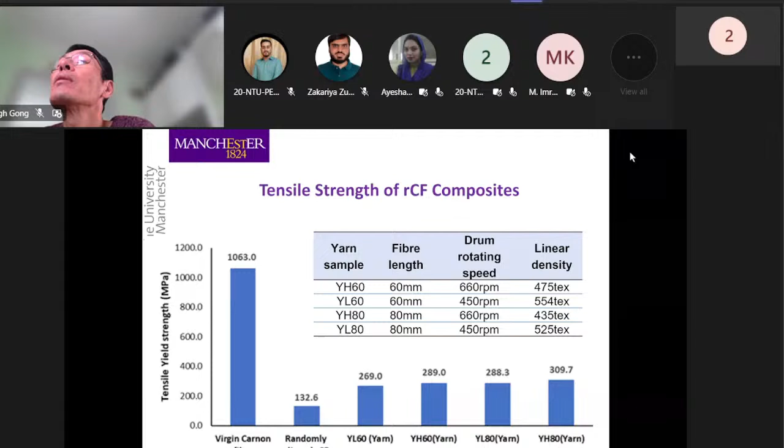So things that we have to further resolve: one is the dispersion of the fiber. The better the fiber is dispersed, the better. The more evenly dispersed the fiber is, the better the eventual yarn, and that way you can reduce the entanglement.

As we know, in any spun yarn, fiber entanglement is going to cause problems in the yarn structure. What we ideally want is the yarn to have all the fibers aligned in the twist direction, and that way we can control the strength of the yarn much better.

The other thing is actually the life cycle assessment in terms of the actual costing. Because you can try a lot of technical developments, but in the end, if the process is not economically competitive to virgin fibers, because we go through a lot of reclaiming and then reforming, we haven't really done any calculation in terms of how much energy and labor input is required to actually achieve the eventual composite.

We're hoping, because the process is cheap enough, it is still economical, but we don't know unless we do a proper assessment. Life cycle assessment is quite popular at the moment with a lot of recycling processes.

Now we are also exploring other options. Some we have, some we are trying. This is because, as I said earlier, during the process of using recycled carbon fibers, we realize there's a lot of dust material being generated. Now, one of the ideas is, can we actually use those dust materials, the carbon dust?

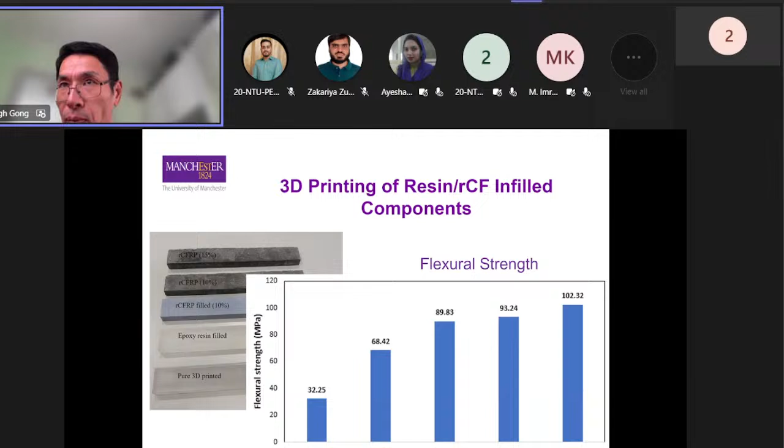The other one is to use compound spinning by mixing recycled carbon fiber dust material with polypropylene and then spin it. And we also try to mix it with graphene. Of course, we are in Manchester, we are using graphene almost in everything nowadays anyway. This is done in collaboration with the Graphene Engineering Innovation Center, which is on campus.

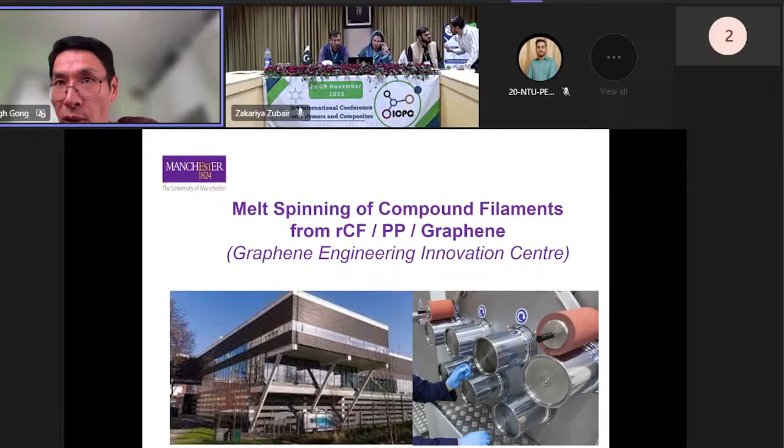They are, of course, mainly collaborating with industry, not really with academics, but still, for this one, we had industrial participation, so we managed to do some work here. It's not very successful at the moment because we found by mixing these recycled carbon fiber materials in there, we actually had a fairly lower strength, even with graphene, so it didn't work too well. But we hope there are certain things we can look into to try to improve it.

The other thing is using tape instead of making them into yarns, by converting the recycled fibers into tapes, which of course has alignment. I won't describe too much in detail. Again, we have a project, we have a publication on this. You can find this information very easily.

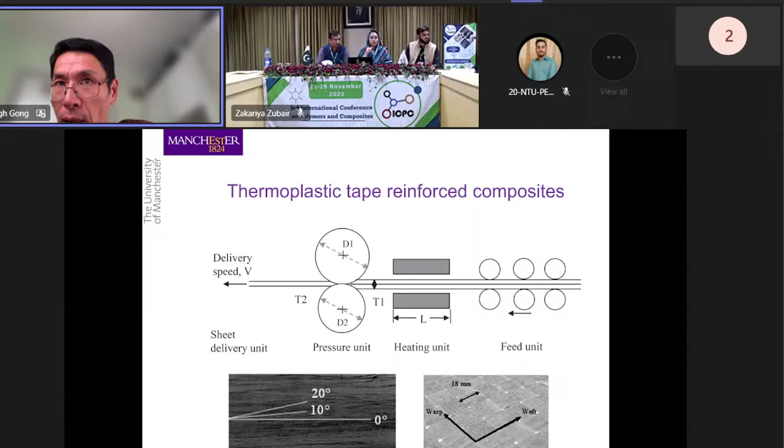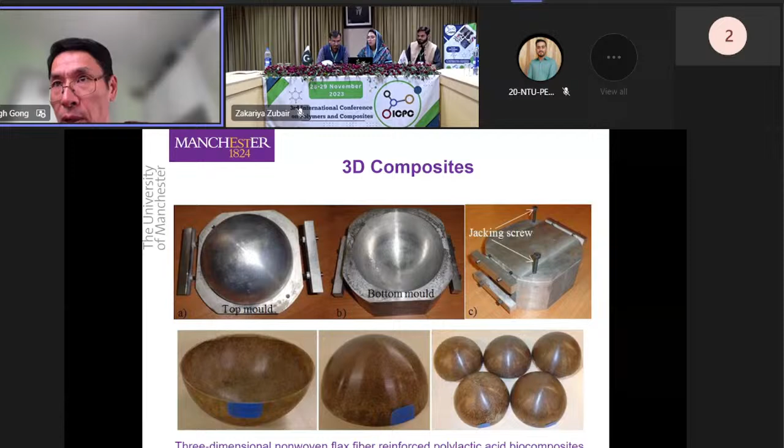Finally, we're also considering using 3D nonwoven processes, trying to make 3D shaped products directly. This is based on what we have already developed in our lab, a 3D forming process where you can actually form a 3D nonwoven sort of composite directly. This is also published in the journal Polymer Composites. So all these have been tried already in terms of the process. We're just trying to use a different material with the process. So that's the publication details.

I think that's really all I want to report to you. Thank you very much for your attention.